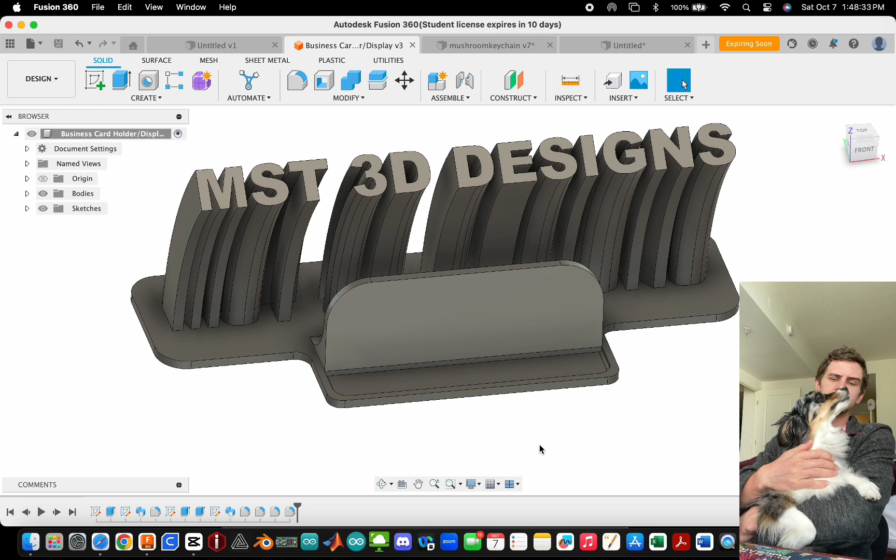Fillets. Not the type you like. The best kind, he loves them. I love them, they're needed. They help everything, they make things look good. And they're fun to just mess around with, really. You know, they can be the make or break for most prints, you know.

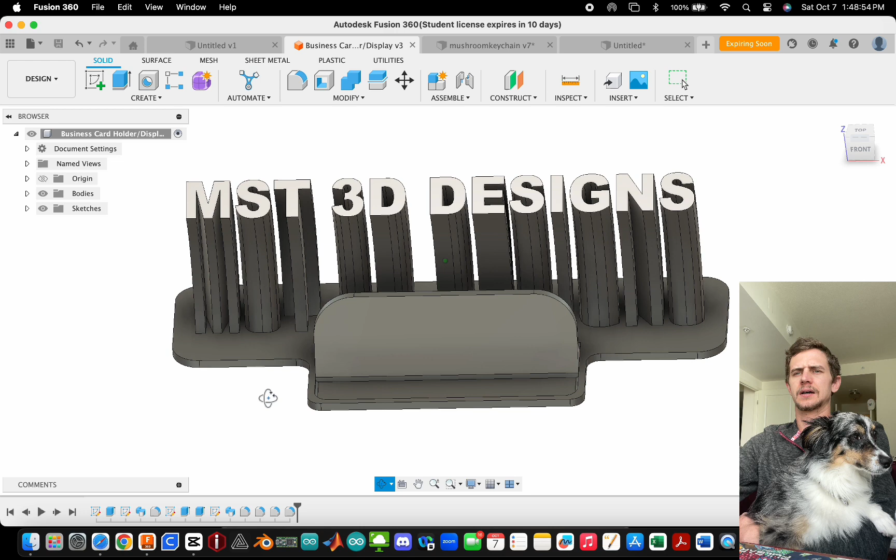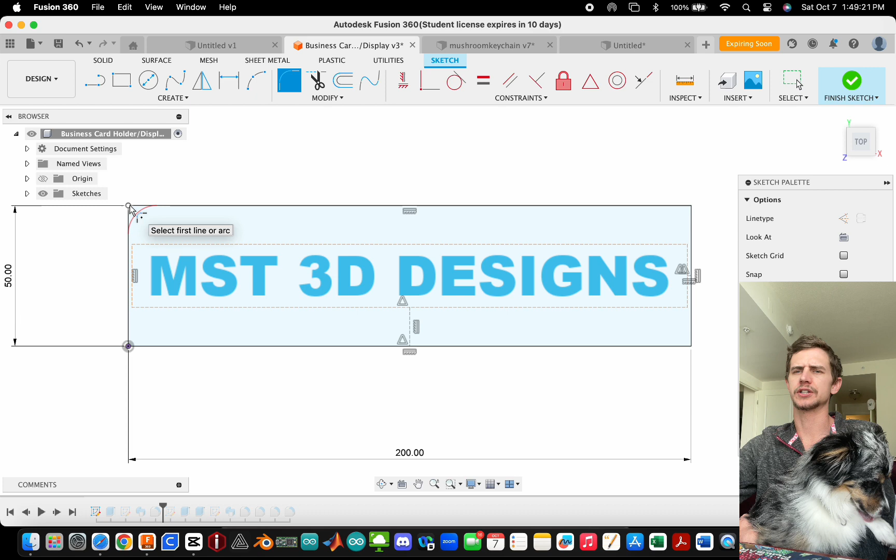I guess we'll start off. So you can fillet two different ways, basically. If I take it back to the beginning with this one, I just filleted the edges here. But what you can also do is when you go into the sketch, you can sketch the fillet pre-extrusion, really. But if you did that, you wouldn't be able to change it easily as if you did it this way, because if you just did a 3D fillet, you can select all those corners and then change it however you like, right?

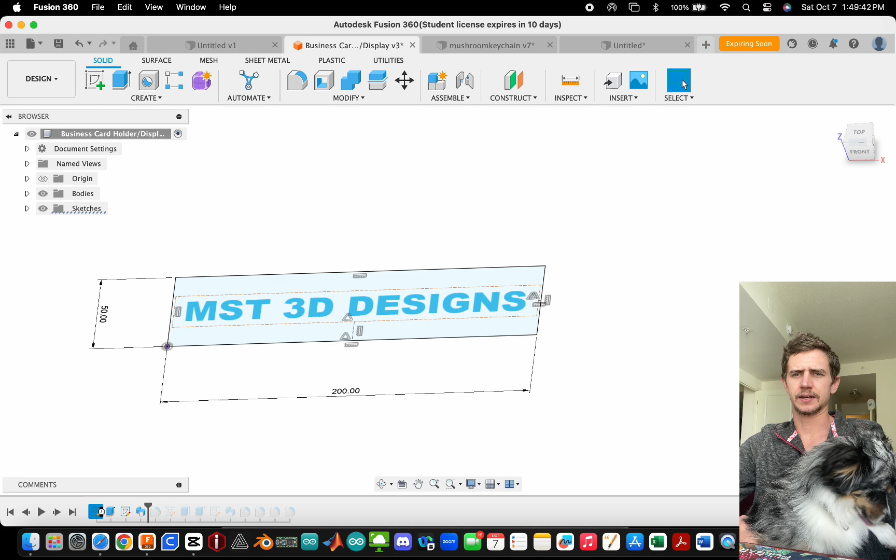But if you did it in the sketch, so if we take that away, and then we went back to the sketch, and you did, you know, you wanted all four corners filleted like so, well now you'd have to change every dimension, right? I don't know if you can change that dimension at all.

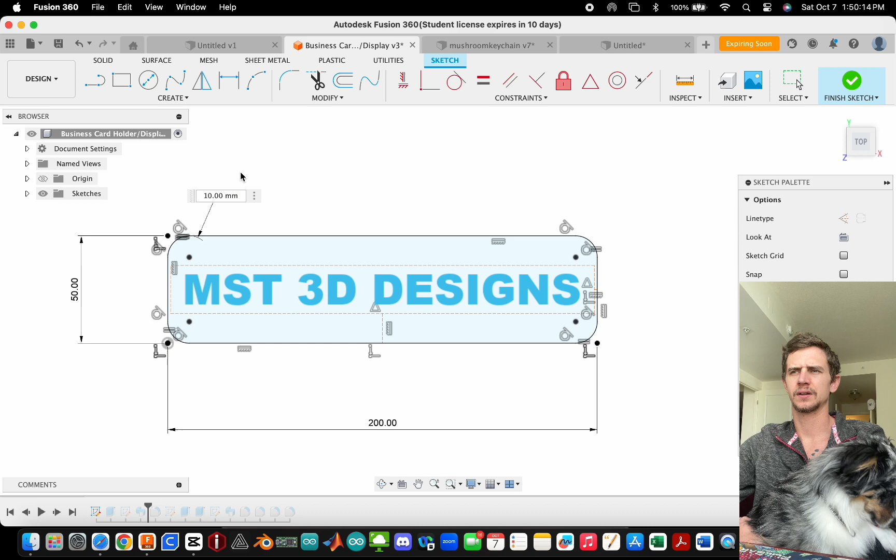Yeah, so that's even a bigger, you know, I guess red flag almost is, oh, now you can, okay. So you can change it for each one. I don't like that though. So we'll just Control Z, Command Z, undo all of those. And now you've got it back in 3D.

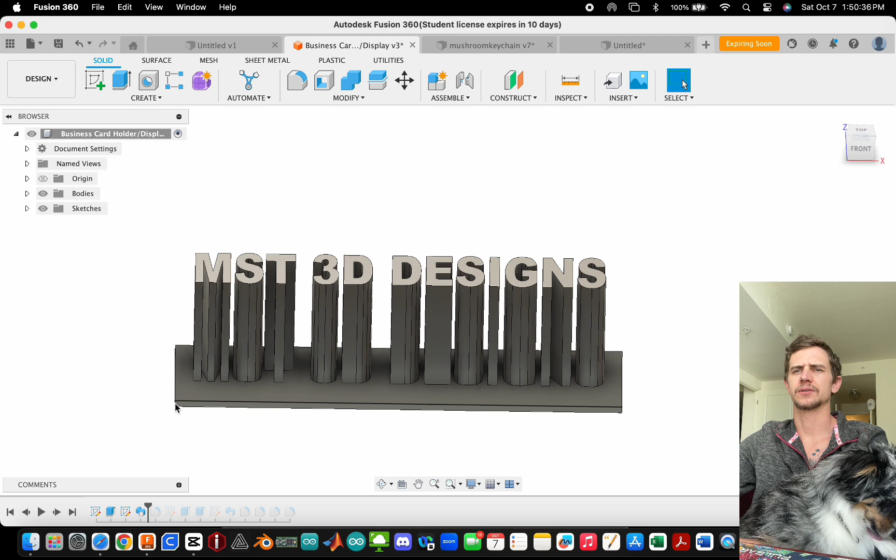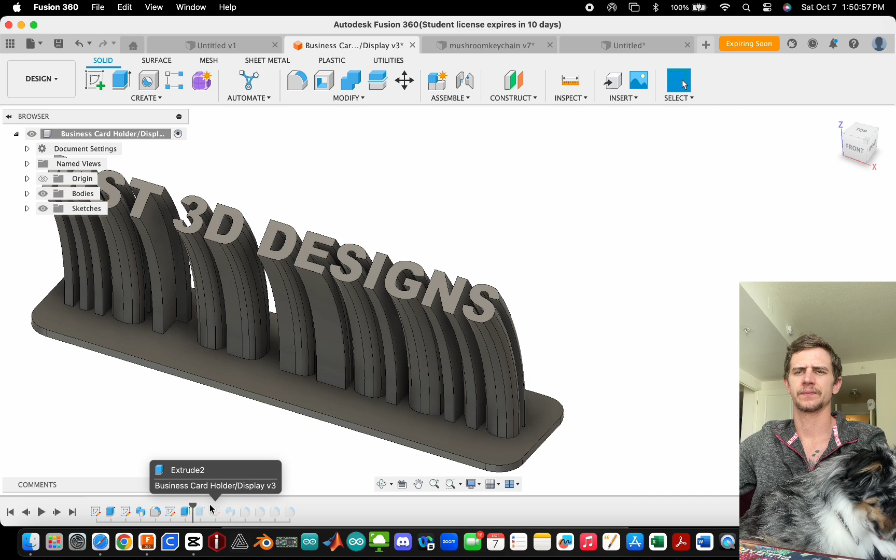I think the 3D is better too, because you get a better sense of what it's gonna look like in 3D, because you can look at a sketch all day long and be like, oh, it's just gonna look like that. But when you actually look at the full part in its 3D form, and then you check it out, I think it looks a lot better. And then you can analyze it more, especially with something like this.

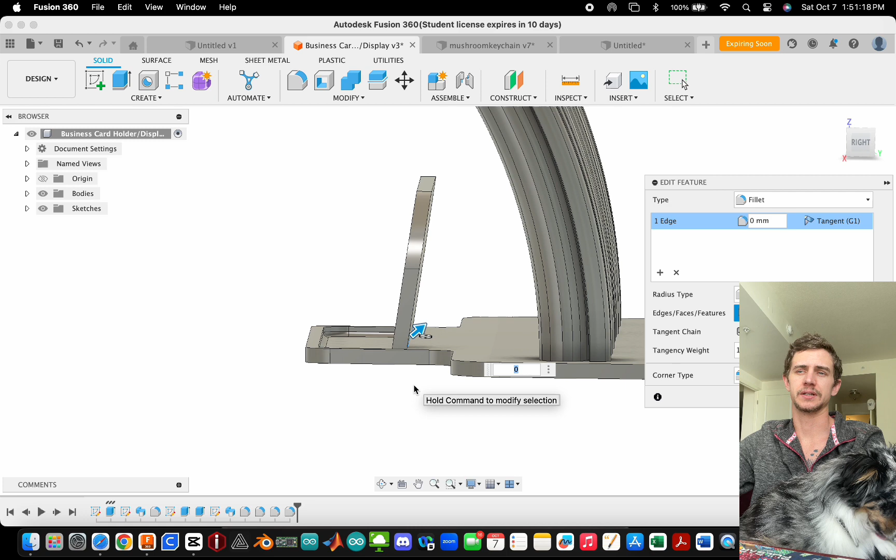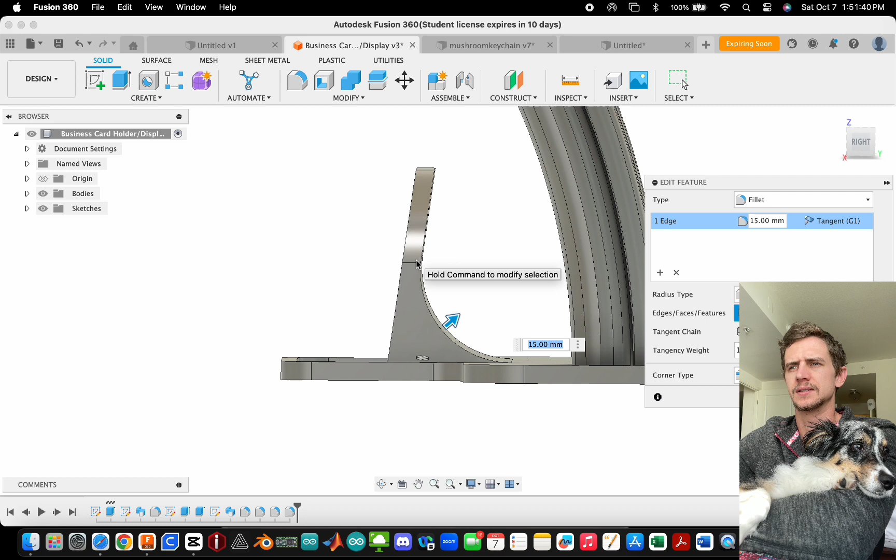You know, like we want this back fillet here, because if this wasn't here, this part extruding up would be more prone to, I guess, break, you know, there's not much structure behind it. If there's any forces coming onto it like this, it might crack, it might break. But if you add this fillet right here, so we had it at 15, now that breaking point is about midway up, which significantly helps it out, right?

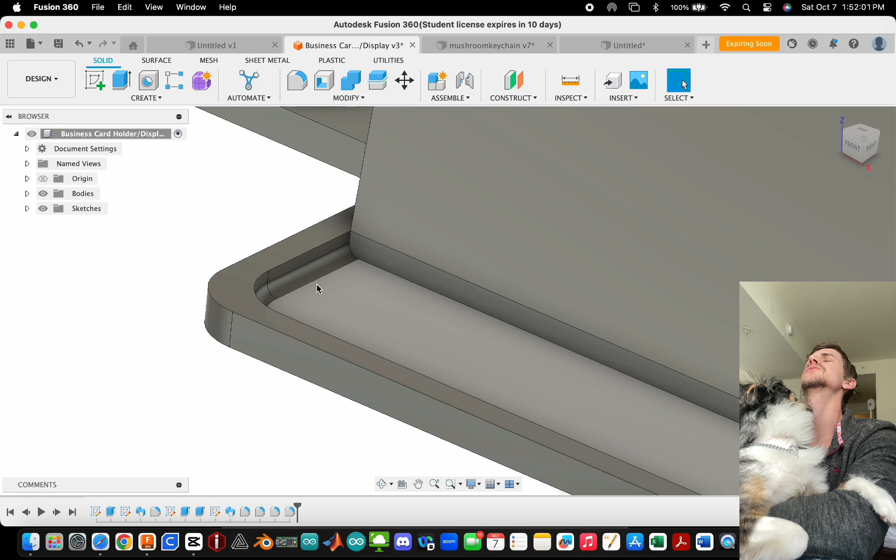And then also, as far as usability goes, fillets are very useful. Okay, I know I keep using your favorite word. Fillets are very useful for just usability in general, right? So if you just had a crease down there, or an edge, I would say.

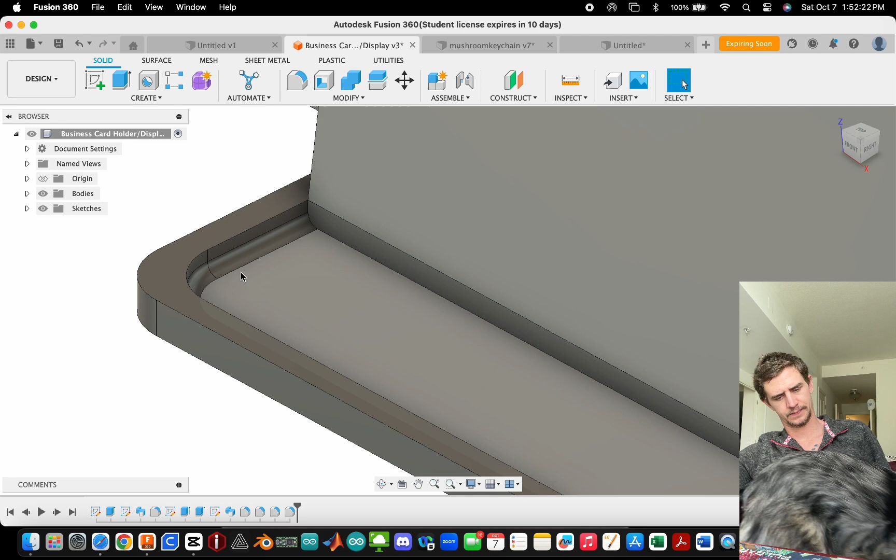Are you done? You want to get done? There it is. Then, you know.

I don't know, what I'm trying to say is basically fillets make everything look better. They help the printer out. There's not such sharp angles. And it gives structure, and with prints, that's what you're really looking for, is that structure almost.

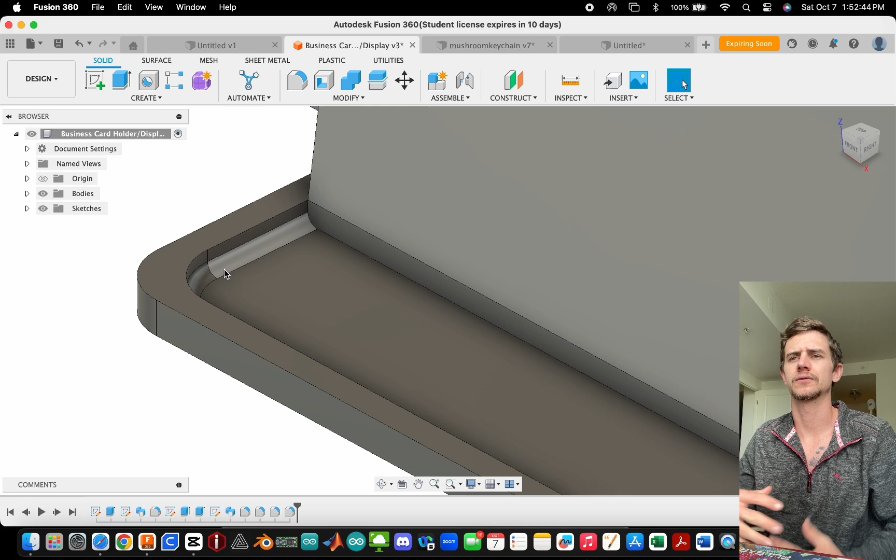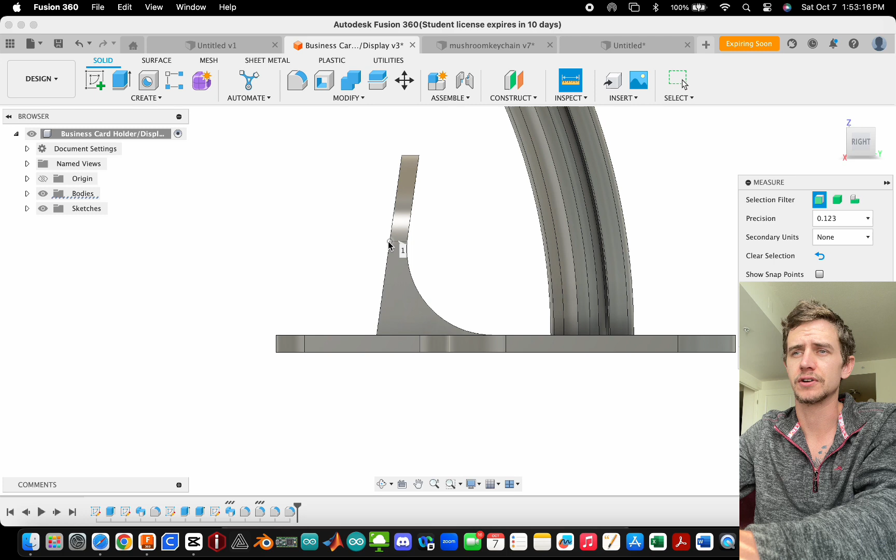And even then, if you're printing something like this, say, and this was thinner, right? Because if we select this line and hit I, you know, that's 3 millimeters thick, right? So it's not a lot, but it's enough to get the job done. But say it was 0.5 millimeter thick, it would be more prone to breaking during printing and during usage if it didn't have the fillet. But now that that fillet is right there, and it has that fracture point almost halfway up the body, then it helps a lot better.

Structurally, aesthetically, all of that, right? So that's kind of the thing. You always want to mess around with fillets. You always want to see where can you add them to not only make it look smoother and more natural forming, because at the end of the day, a curve is going to look more organic than just a square, right?

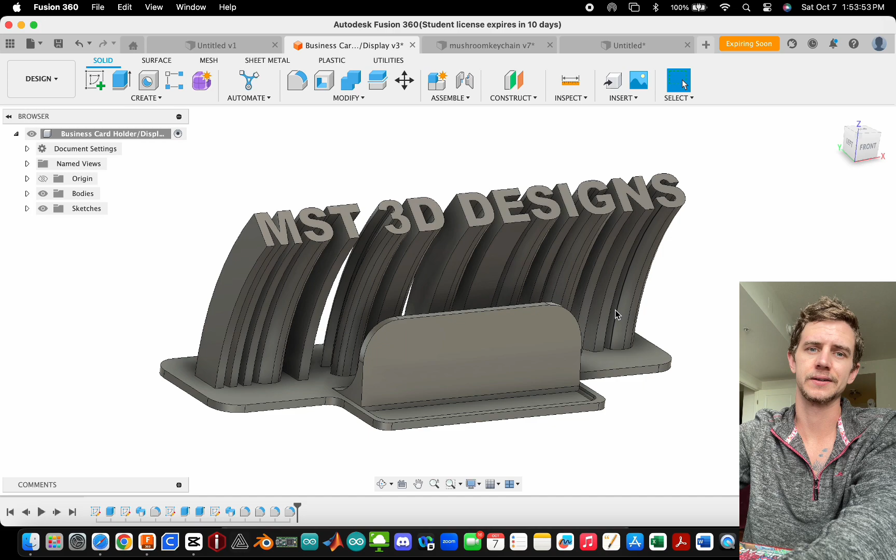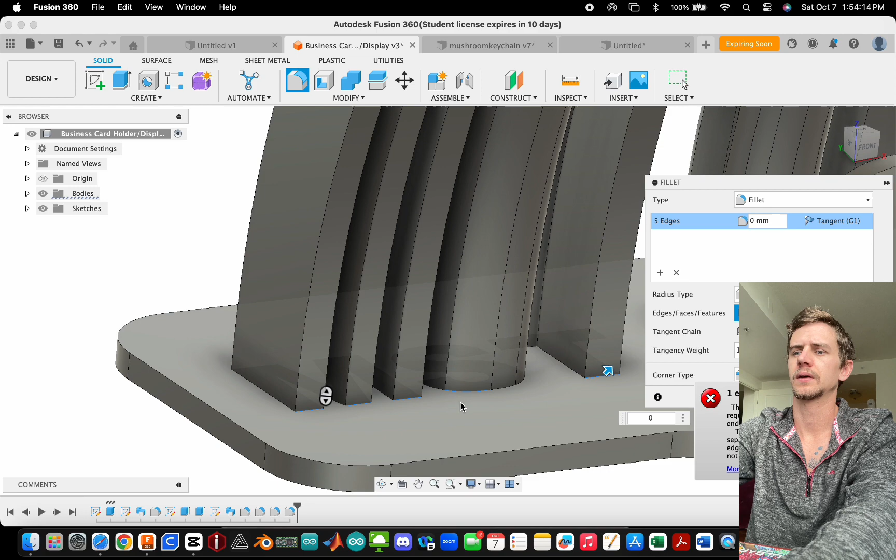And you know, you can even get into it like, oh, I want this bottom piece all filleted up. I'm not sure how well that would work because it's such a weird... yeah. We probably have to deselect that one right there. Yeah, so you see how it kind of, if we wanted to, we could probably add them throughout all of these.

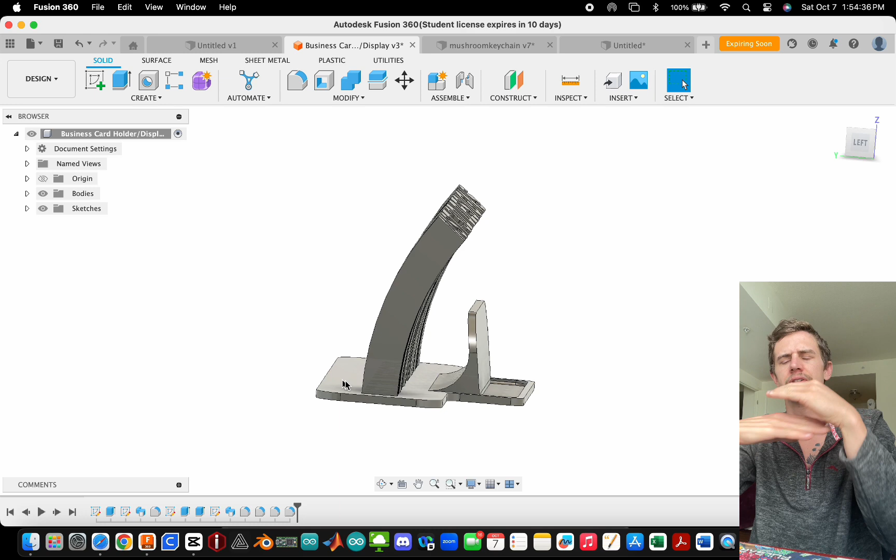And it pretty much gives it more of a structure to lean onto versus just it being flat, you know? So very important to think about when you're printing, especially, because like I said, that can really make or break it.

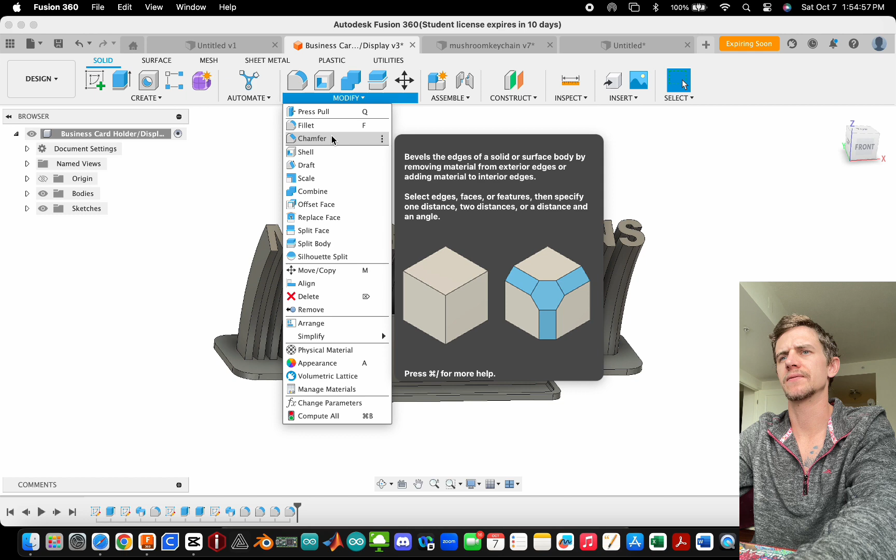I believe that's everything, really. And it's, you can chamfer stuff too, but fillets basically provide a gradual curve, and it's not just angles, right? It's a gradual increase or decrease, whatever you want to call it, and that's a lot more beneficial in the long run.

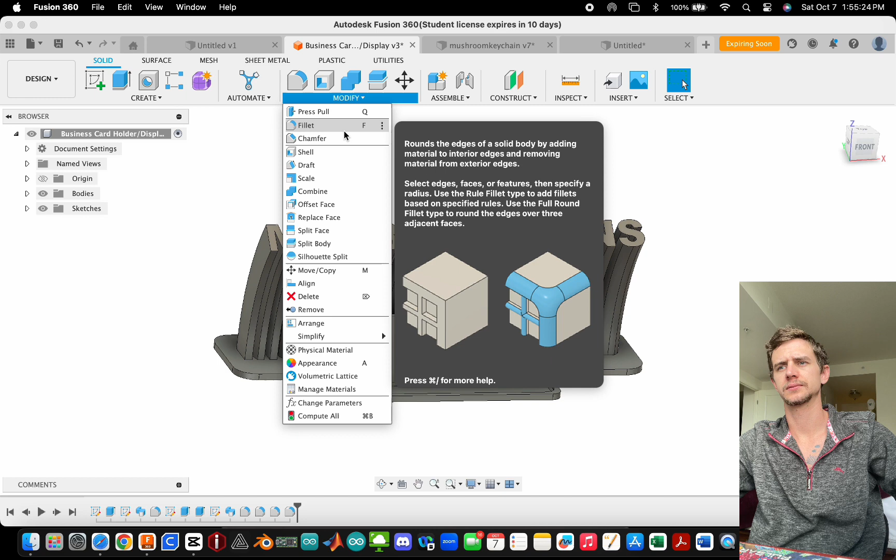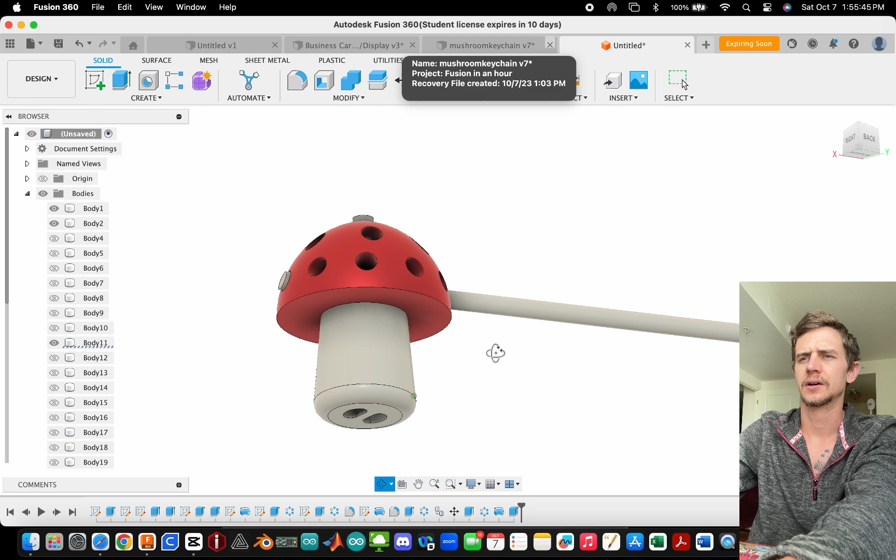That's, yeah, I mean, that's it. Use fillets wherever you can. Mess around with it, do whatever you want to do with it. Like another one, with the mushroom, adding it at the bottom makes it look more organic, right? And yeah, pretty much wraps it up for fillets. Gotta love them.